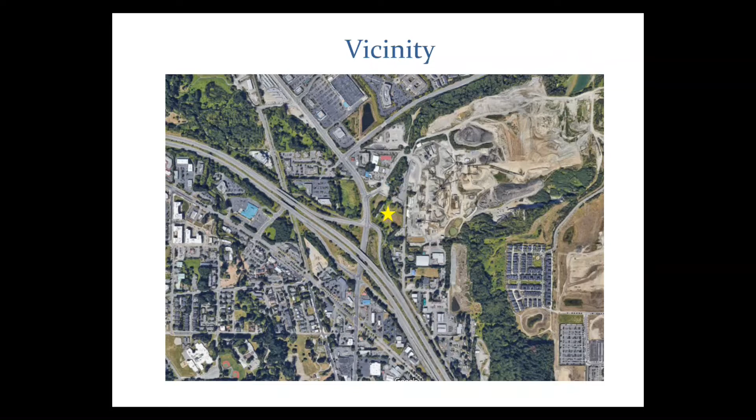Okay, so here we go, the project. The Evergreen Ford proposed site is in eastern Issaquah. It's adjacent to or across the street from the Lakeside Industries site and just off of I-90. Here's the project site again. It's zoned intensive commercial, and the auto dealership use is appropriate. It's an allowed use in that zone.

Surrounding properties are, as I mentioned, the Lakeside Industry site to the east, I-90 to the southeast, and commercial properties to the northwest and southwest. You'll notice in the presentation that north will change and point to the left instead of up, so we've tried to put a north arrow on there to help orient you, but let me know if you're getting confused, and I can clarify that.

So, existing conditions: this is the former Carlson Kennel site. One of the kennel buildings is still on the property but will be demolished. The North Fork of Issaquah Creek runs through the top portion of the site.

The bird's eye image you see here is an older view before the creek was relocated. The creek relocation happened, I think, one or two years ago. We do have an aerial photo showing the current location, and as you can see, the site is mostly vacant with some trees and other vegetation.

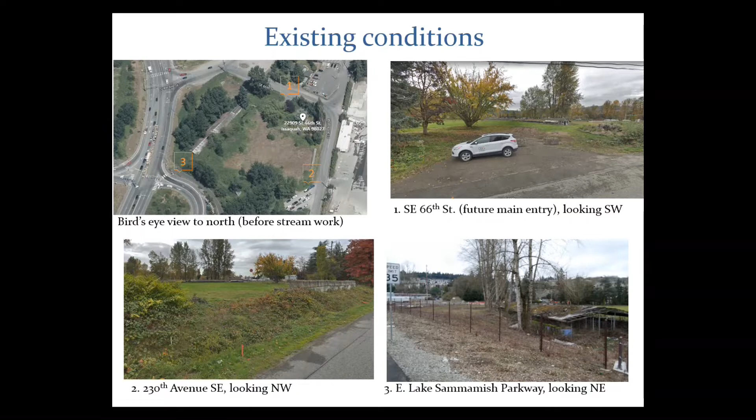Part of this project is also a lot consolidation. There are 2 parcels that make up the development site that are in the process of being joined. And then these images show the former alignment of the creek and then the new alignment.

The stream realignment was done by WSDOT as part of a requirement after the salmon culvert replacement case. They did all of the work, and the city did not review permits for that project.

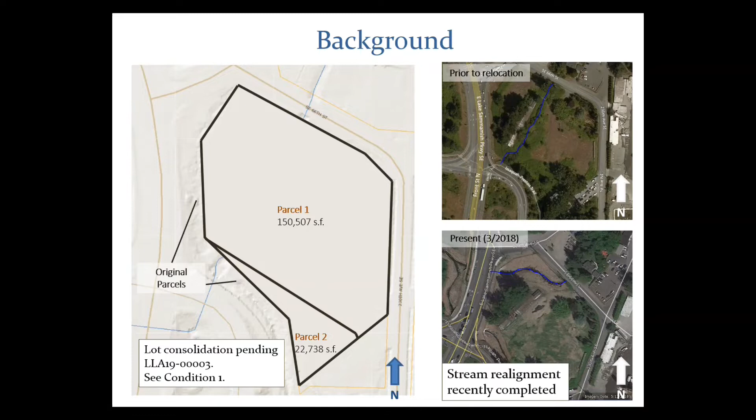So in addition to the stream, the stream obviously is a critical area. The city has buffer requirements for critical areas. A stream has a 100-foot buffer requirement. The applicant is asking for a 25-foot reduction to that buffer for this project.

We're still working to determine the exact location of the ordinary high water mark, and right now they're surveying the staked location of the stream, so that's a condition. I haven't included the condition language in the presentation, but I've cited conditions where I'm talking about them, so you can read the full text in the staff report.

This is an area that we're also still working on. The buffer is shown in purple on the map. That's the portion of the buffer that's on the site. The buffer is 75 feet in either direction of the stream, though, so the buffer extends also onto the right-of-way.

The green shaded area is where we've generally shown that there may be additional buffer impacts when they're replacing or installing sidewalks or bike lanes or doing improvements to the roadway. Those additional buffer impacts need to be studied and mitigated as well, and that will be reviewed with construction permits.

The site has a mapped floodway and floodplain, which I've shown in the picture on the right. The stream relocation may have eliminated the floodway and floodplain, or at least the floodplain. If that is in fact true, the applicant would need to get a map change through FEMA, and that's pending. At this point, we don't have documentation that the floodplain has been moved or removed.

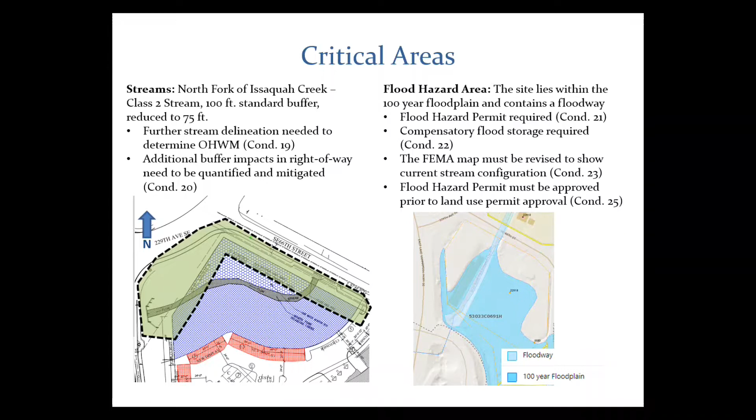So there are still conditions that they need a flood hazard permit. That may go away if they're able to amend the map.

A couple infrastructure notes: the site, in addition to having the creek and the floodplain, is also a critical aquifer recharge area, so its hydrology is feeding drinking water. I passed out a letter we received from the Sammamish Plateau Water District, and they had some concerns over the stormwater plans for the site, wanting to make sure that aquifer is kept clean.

So the applicant is working with us to refine their stormwater design. We feel that there is a way to get to a place where both the city and Sammamish Plateau agree that the design is good, and we think that can happen without majorly reconfiguring the site. So we feel confident that we can move forward with the land use approval and figure that out with the site development permits.

The site will be accessed off of 230th Avenue Southeast and 66th Street. The access off of 66th Street will be designed as a pedestrian priority street, which is a Central Issaquah standards street type. We're working with the applicant to figure out some sight distance issues at that intersection and also redesign the corner where 66th and 230th meet.

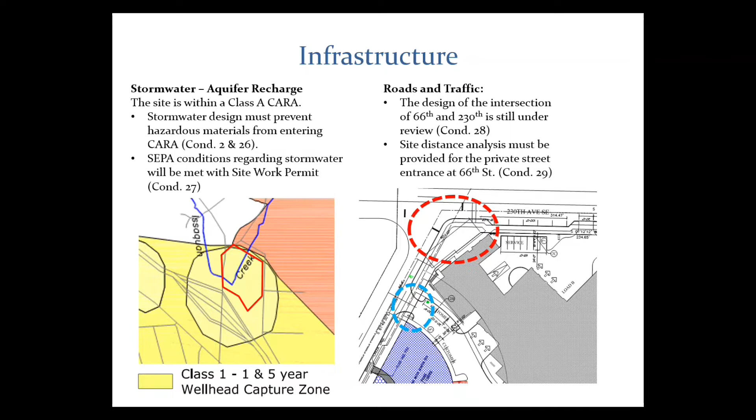Okay, here's the site plan. The proposal includes 2 buildings. The main building will house a Ford dealership, a Lincoln dealership, and a service and parking facility. It'll be a structured parking garage with service uses on the bottom.

And on the very bottom of the site, a display pavilion building will be there. That was a way for the applicant to meet the street wall requirements, because that is a frontage on East Lake Sammamish Parkway. So working with the applicant to figure out a way to meet that street wall, they suggested a display pavilion use where they could display antique cars or potentially hold community events, and we thought that was a good solution.

I also want to point out the red areas are merchandise display, and we wanted to make sure those were seen as display and not parking. Although cars will be there, this is not required parking, and it's not counted toward their parking. There's no stipulation on how the cars need to be oriented in that space. Essentially, it's like a shelf for their wares.

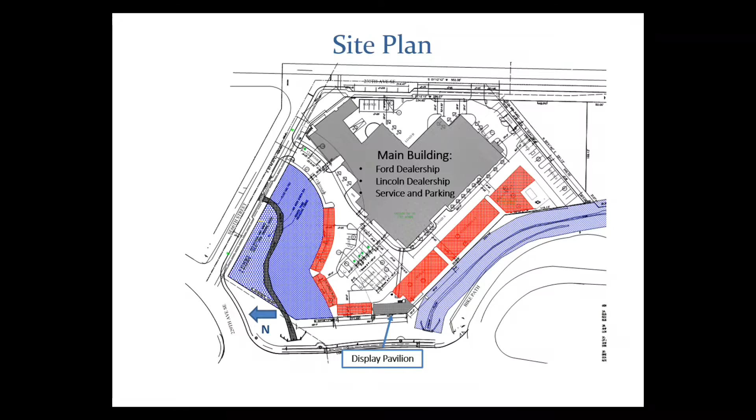Just a quick summary of compliance with code: it does meet the floor area ratio, height, setbacks, and impervious surface standards.

I'm going to go through a few interpretations we made when reviewing this permit. They'll make sense when I talk about them.

The pedestrian priority street is a street that has a landscape strip behind the sidewalk, so the sidewalk blends into the road and then has a landscape strip behind it. We thought it was appropriate, since that road was adjacent to the critical area buffer, to have the buffer serve the function of that landscape strip. So we haven't required an additional landscape strip on that side of the street. There is landscaping on the other side of the street.

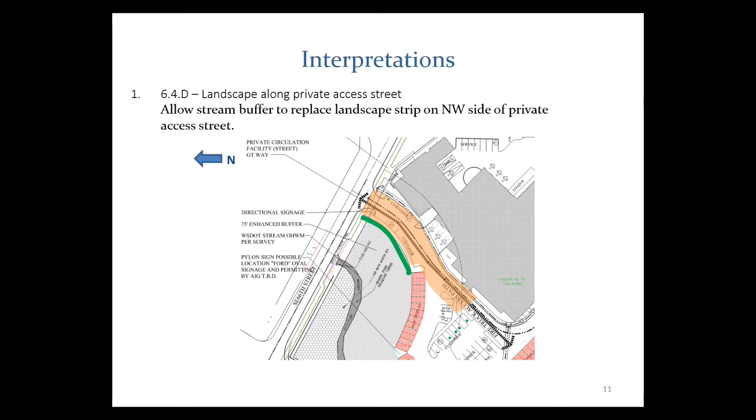This site would, according to Central Issaquah standards, require a through block passage, but some of the neighboring land uses and the critical area didn't really make that possible or make sense. It's not an environment where we want to encourage a lot of pedestrian activity, with the I-90 off-ramp to the south and Lakeside Industries to the east. We also wouldn't want to impact the buffer by having a through block passage through the critical area, which didn't leave much opportunity for one without bisecting the site. So there will not be a through block passage.

Similarly, the build-to line is required, but we've decided not to require the build-to line within the critical area buffer, to avoid impacting the critical area.

Along 230th Avenue Southeast, that's actually the edge of the Central Issaquah plan area. Once you go onto 230th, you're outside the plan area. So we excluded that street from the building frontage requirement as well.

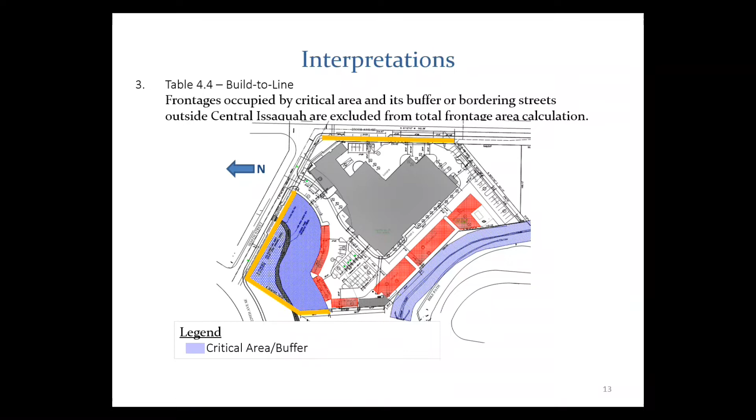The Central Issaquah plan does show the site for a proposed park, but the park strategic plan, which was adopted in 2018, does not. Since the park strategic plan was adopted after and is more current than the Central Issaquah plan, we've deferred to that plan, so there's no park location there.

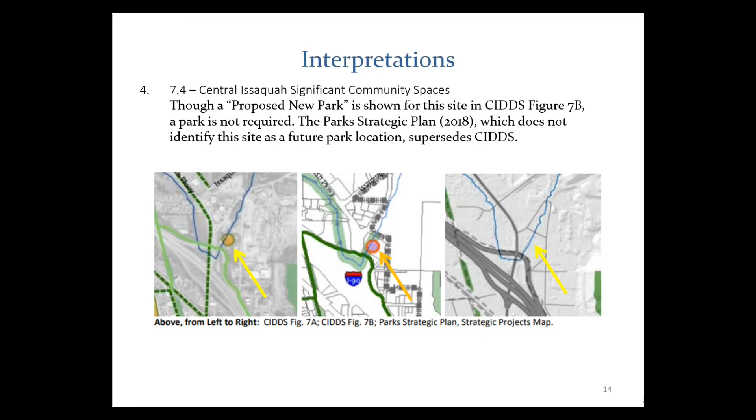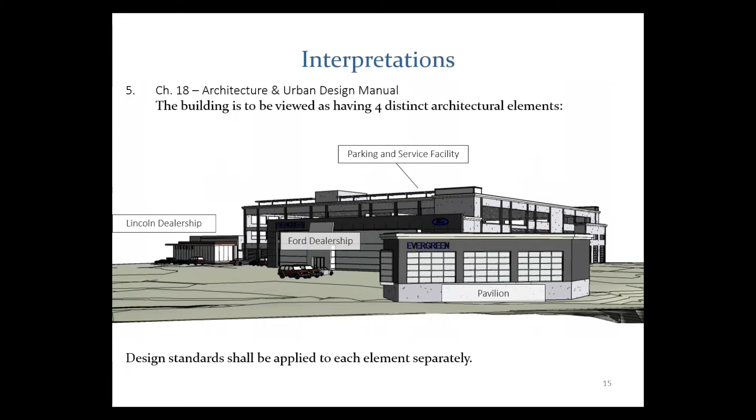When applying the design manual to this site, we interpreted the manual's approach of allowing sites with multiple buildings to have different styles, applying that by allowing each of the different elements to stand alone as distinct architectural features. So the Lincoln dealership and the Ford dealership are two different businesses with different franchise requirements for their designs, and those will be treated as two different buildings essentially. The Pavilion building is also its own building, and the parking and service facility functions as its own thing as well. Each of those will be seen on their own and will need to comply on their own.

We're actually in the middle of the SEPA comment period. The proposed MDNS was issued last week, and we're looking at some stream and buffer mitigation issues. The applicant spoke with the Department of Archaeology and Historic Preservation about this site, and although there's no mapped artifacts or historic structures, it is a stream area, so there's a high likelihood there could be cultural resources. We'll add a condition to address work stoppage if anything is discovered.

As I mentioned, we're still working through some circulation design issues. As far as public comment goes, we received one comment asking about the project's sustainability, and a comment I handed out from the Sammamish Plateau about stormwater and the critical aquifer recharge area.

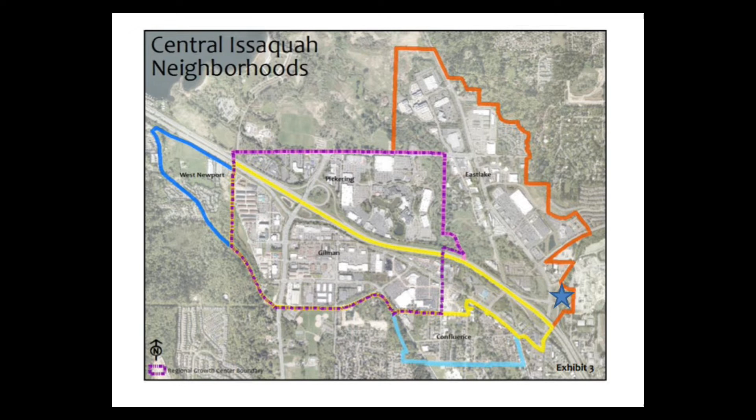This project is down here at the blue arrow, or the blue star. As I mentioned, it's right on the edge, in the Eastlake neighborhood of the Central Issaquah sub-area. Each neighborhood in the sub-area has some developer obligations that collectively help the city achieve the vision for the Central Issaquah area.

Each of these obligations is reviewed in the staff report, and we found all but one to be compliant. The one we're requiring a condition for—and they may have already met it with their redesigned plan set—is that the developer must provide wayfinding for local and regional trail users as supported by the city's wayfinding plan. The Issaquah-Preston Trail is down here on the southern part of the site, so we've asked that wayfinding signage be provided at the site's entrances to direct folks around the corner to the trail.

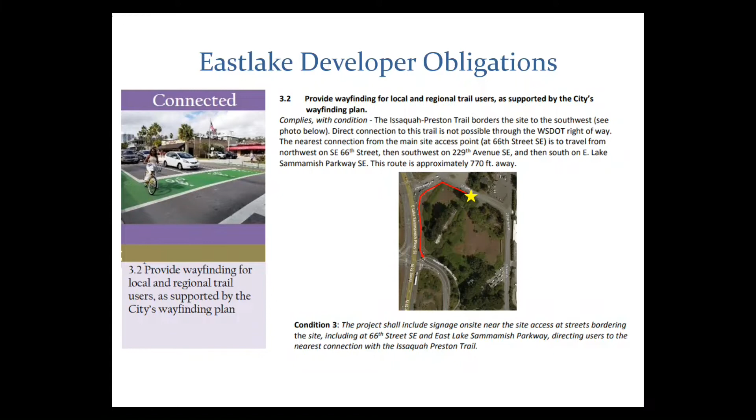It'll be used by dealership employees to store cars and to park customer cars for them. We looked around the site to find the nearest bus stops, and they're quite a ways away across I-90 down on Gilman.

All right, so I'm just going to go through a couple more of the design elements of the project and then the design manual itself. The pedestrian priority street is going to provide a way for the building to front directly on a street instead of having the building front on a surface parking lot.

So it'll have travel lanes and parallel parking, a walkway that's separated with bollards or other safety features to prevent people from walking into the roadway, and then the landscape strip. We've asked for some more design details on, for example, lighting and bollards, but at this stage of the review, they've provided sufficient information that we can review the details later with construction permits.

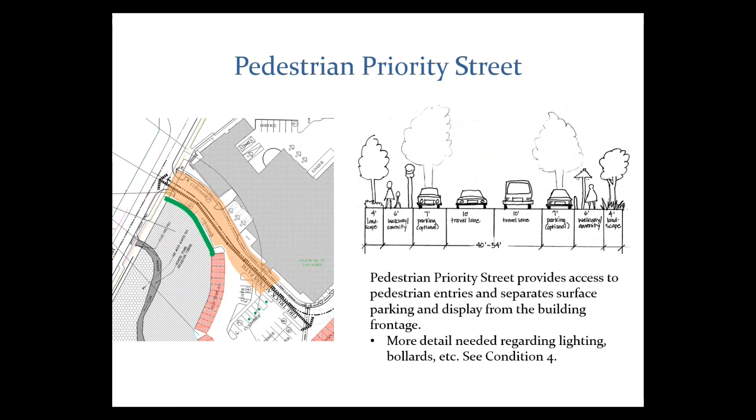Southeast 66th Street will be designed to a collector arterial standard, and that has a requirement for a landscape strip. And they do provide a landscape strip on all of the frontage except where the bridge crosses the North Fork. They've asked for a deviation because it's difficult to establish a healthy landscape strip on the bridge with not a lot of depth for planting.

So the deviation from the standards is under review, and we propose adding a new condition because the deviation request has not yet been approved. We had hoped we could have it approved before the meeting, but it's still under review, so I'm proposing a new condition that they need to have that with their construction permits.

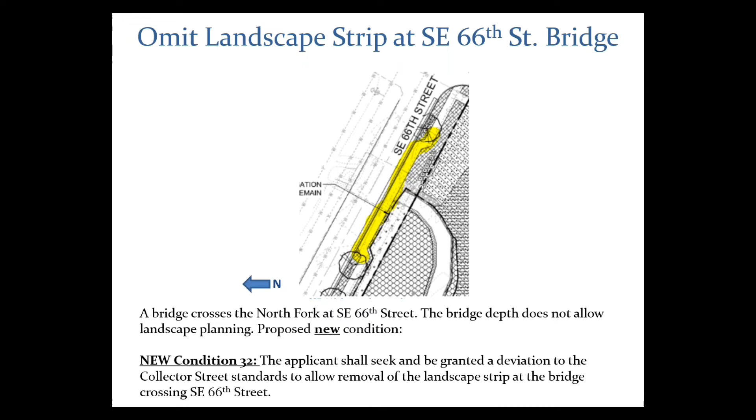So an adjustment of standards is being requested to move the bike lane off of the roadway onto behind the curb, onto the right-of-way, and then put a landscape strip between the bike lane and the roadway. And then in addition to that, a sidewalk.

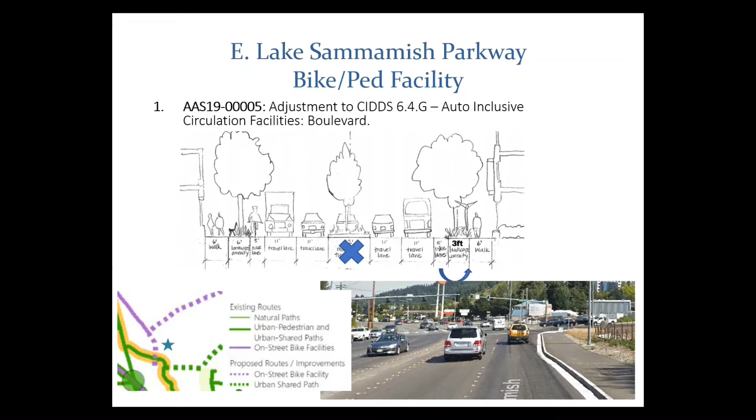On 230th Avenue, right now the design has 2 driveways, and the city's engineers were concerned that didn't meet their access point spacing requirements. So we're asking for a redesign, or at least reconsider those driveway configurations.

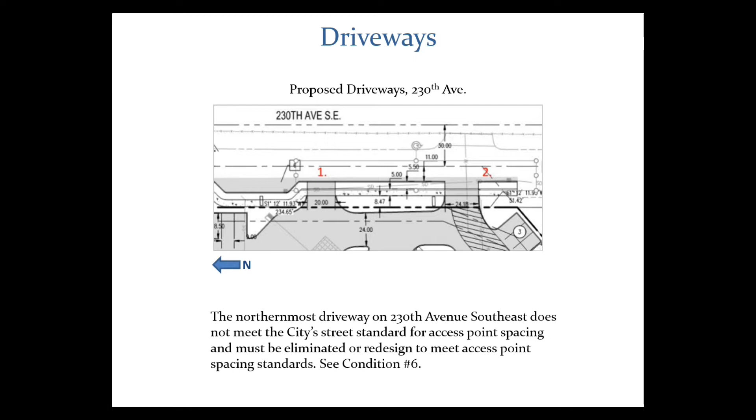I just wanted to briefly touch on the parking. Since this site appears to have so many cars, and there is a parking maximum for this location, but as I mentioned, a lot of the cars on the surface will be display spaces, display merchandise, and not required parking. And the maximum parking number only applies to surface parking and not the structured parking.

So a total of 300 spaces are proposed, but only 64 spaces of parking will be surface spaces. So it does comply with the maximum space and the structured parking allocation as well.

And this is an issue that we're still working with the applicant on, but CIDDS does require a commute trip reduction plan for this site, and it's possible that it wouldn't apply if the facility employs fewer than 100 people, but we didn't have information on employment numbers, so at this point, it's still a condition that they need to meet.

The rooftop has some landscaping. The Central Issaquah standards, or the design manual, have requirements for active uses in the urban core for rooftops, but this is not in the urban core, and they are using the roof for car storage. So they will have screening and a trellis for screening and some interior landscaping.

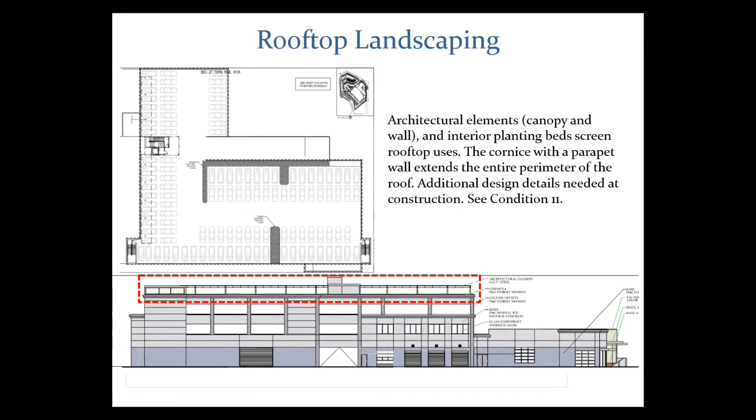This is a shot of their landscaping plan. The site does have several significant trees on it right now, and the plan is to not retain any of those. That is allowed under the Central Issaquah standards as long as they meet replacement or in-lieu payments to replace trees, and we're still working out those details. Those will be worked out with the construction and the landscape plans.

The mitigation area planted by WSDOT was not done with city review, so we didn't know whether that area was sufficiently planted. We required the applicant to make sure it did comply, and in the meantime we worked with our stream consultant at the watershed group to review the plantings. They concluded that the WSDOT plantings did meet city standards, it just needed more ground cover. So as part of the applicant's mitigation of their new buffer area, they'll need to bring that existing buffer area up to city standards.

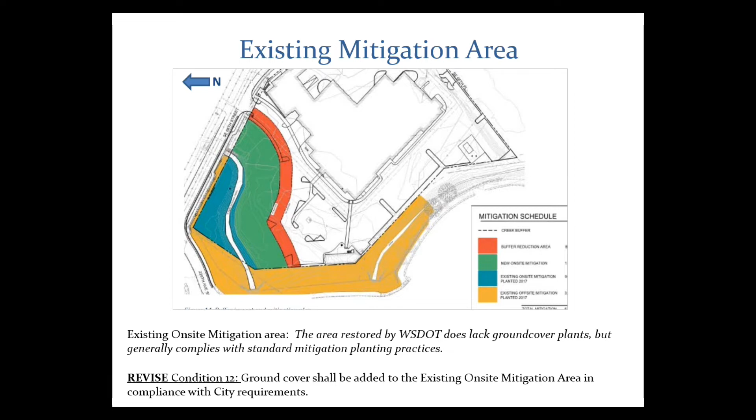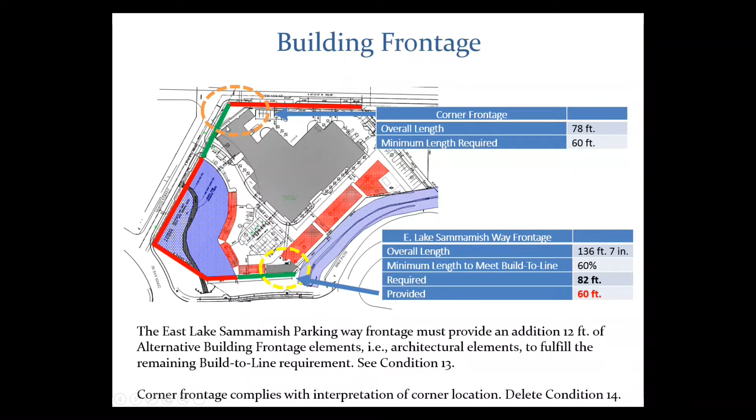And then the frontage up at this corner, the property line actually - I'm going to go to the next one. The property line is a little bit inside of the corner, so as you can see, the building fills that whole corner frontage. If you noted in the staff report, this corner change was received late, and I misunderstood the location of the property line, so I had a condition that they needed to provide additional frontage. But after reviewing it more closely, I see that the property line is actually set in from the curb and that they do comply.

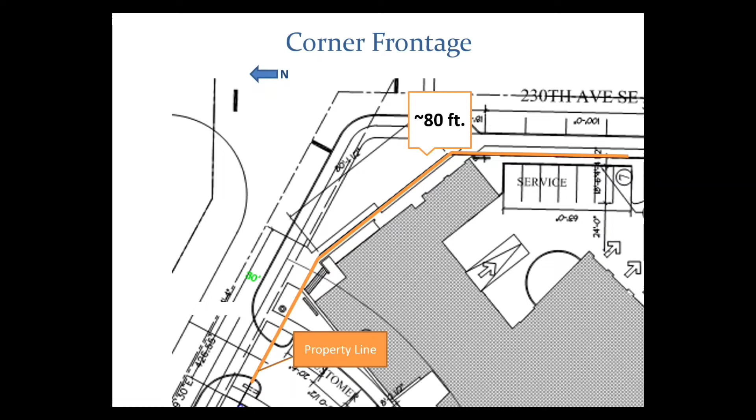Just a couple other site design issues or conditions that I'm requiring: they need to show all of their above-ground utilities on their plans and make sure they're screened to minimize visual impact. We're asking for additional design details on their waste enclosure, including wall materials, roof, size, et cetera. We know its approximate size and location, but there are a few more details to work out at construction.

The property is located in the traditional Issaquah design area. The style the applicant chose was Northwest Revival, which is appropriate in this traditional Issaquah area. As conditioned, we feel the proposal is substantially compliant with the Northwest Revival style, and there are a couple areas we wanted to discuss with you. We worked pretty hard with the applicant to push them to bring their design into compliance, and they made several changes while balancing the design requirements of the Lincoln and Ford franchises. So we think the results are pretty good.

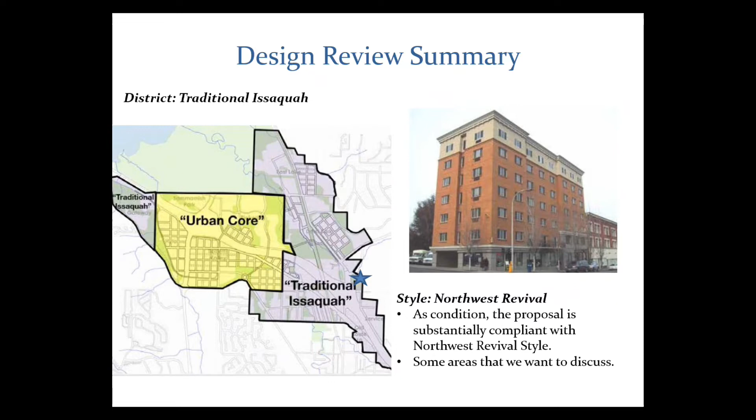I'm going to go through each of the four architectural elements separately and then open it up for discussion. After I finish, I'll give the applicant a chance to present, and then we'll do public comment and open it up for discussion.

The Ford dealership facade has a mixture of glass, stone, and metal. The frame around the outside is a limestone panel - I'll hand this around. The middle feature by the door is a metal aluminum composite panel. The parking structure is visible behind it, but we're looking at that separately. The two main forms are the glass curtain wall and the limestone stone frame around it - those are the main elements of that design.

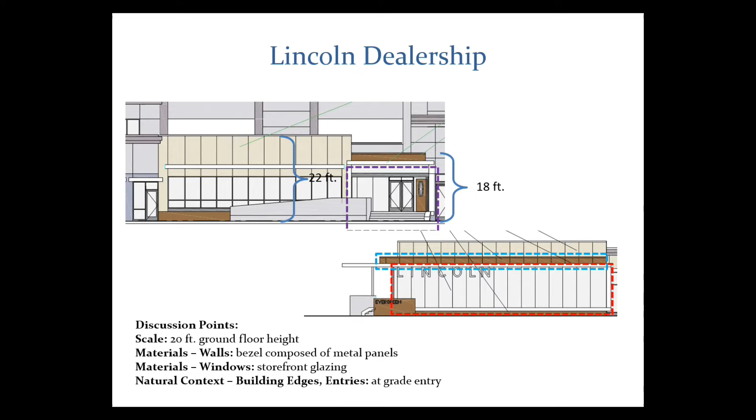The parking and service facility is cast concrete. It'll be painted in three different colors: the base will be a medium gray, the body a lighter gray, and the cornice a dark gray paint.

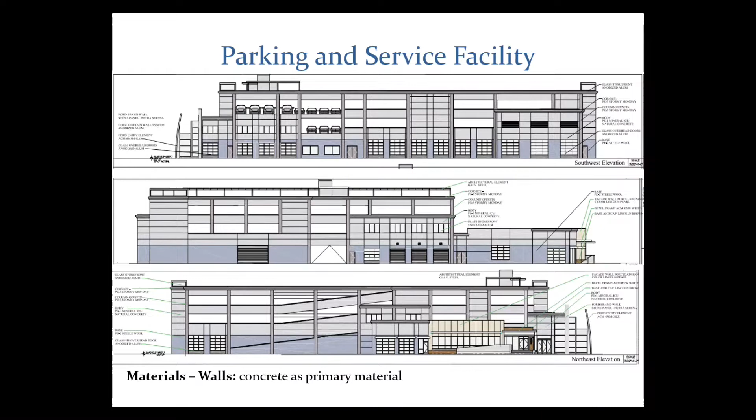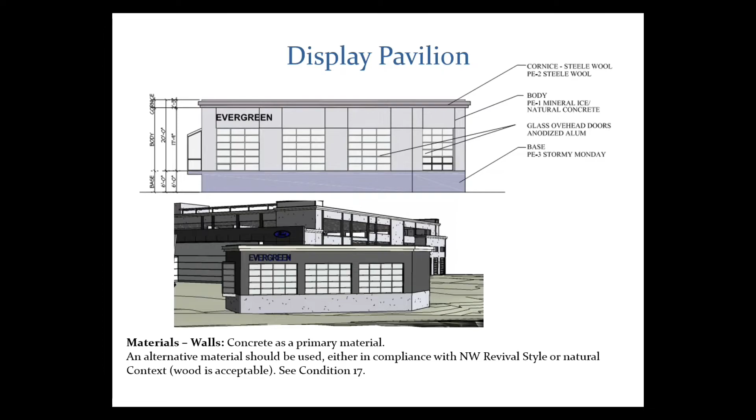That same color scheme is proposed for the display pavilion, which has the concrete base and windows. We don't have a shot here of the doorway, but it's essentially a structure with a lot of windows to be able to see the display vehicles inside. And that is the end of my presentation.

David, would you like to say a few words? So let's see if the commission has any questions before we switch over. I thought what we said was we'd like to hear the applicant's presentation, and sometimes then you want public comments, clarifications on this specific presentation before we move on. I think maybe better wait till the end. Okay, I'm fine.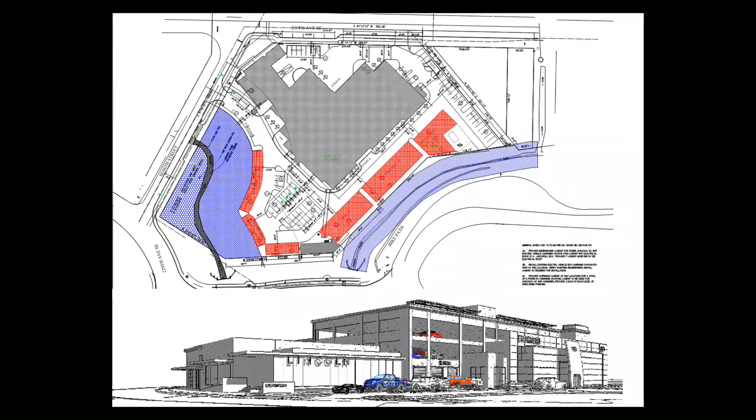Would you like your PowerPoint or no? Or you can just leave this up too. Briefly, my name is David Estes, you need to come stand by the microphone. Oh, God. My name is David Estes. I'm the project architect for the project. The rest of some of the other project team is here to answer questions.

As opposed to a formal presentation, we'd really like to get your feedback and questions. It's a very complicated project, and not knowing the commission's exact questions and interests, it doesn't seem right to just go off in a direction without knowing what you're interested in. So I think we'd prefer just to answer specific questions. Katie and the planning staff have done a great job of presenting the project, and I'm not sure there's a lot we'd add. If you have questions about why we're doing this, what some of the economics are, and what some of the items we've done that don't show up here, especially in terms of sustainability, we'd love to talk about it, but we'd rather answer your questions than present something and not know what you're really interested in. And it seems to be a good point, and I know from public comment the same thing happens on specific questions. So we'd be more than happy, or part of the rest of the design team would be more than happy to answer specific questions, because Katie's done such a great job presenting the project.

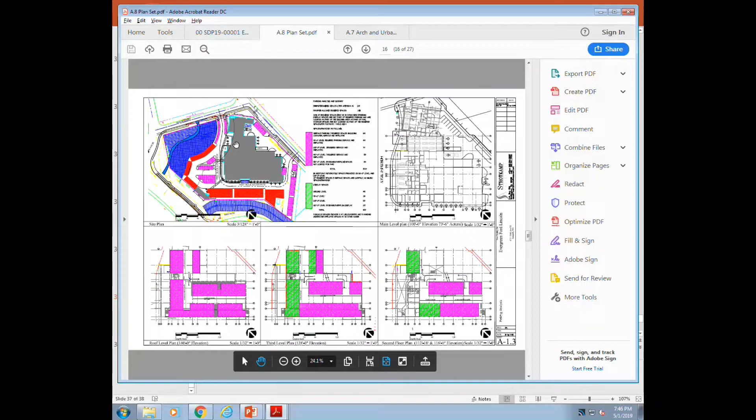Is there any parking planned around that, or a pedestrian walkway? How do people see that? There's a pedestrian walkway from the private street. David, come up, you can't talk from the audience.

Those cars are on display, they're not for sale cars. What cars will actually be in there is open to debate. But there is the potential to move those cars out, the doors open on the sidewalls, and a community event could be held there. That's working out between Dan and the city for whatever that event might be - could be a grand opening celebration or whatever.

But it's a little hard to work the details out of that in the future and not when it's physically there and something comes up. It's a good question because it's something we've had extensive discussion about.

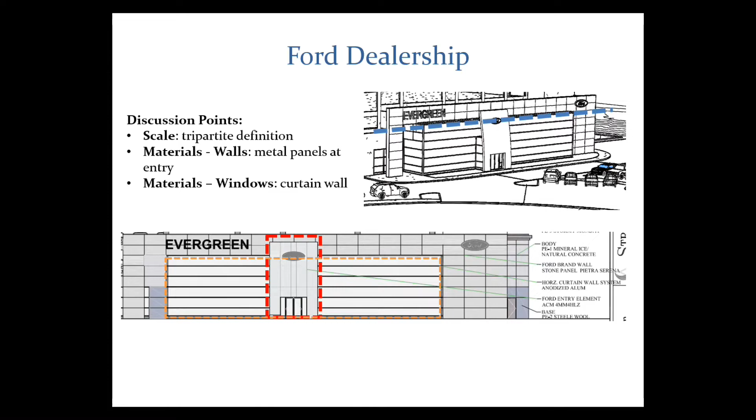So I'm still confused on the parking. On your presentation, you had a chart that identified it, not the colored thing, but just in your PowerPoint presentation. Could you go back to that and help me?

The amount allowed or required is 123 minimum and 246 maximum. The 300, as I understood it, weren't those in the parking structure? So there's 64 surface spaces provided. I'm lost on that, let me do a little math here. So the 64 spaces are included in the 300. There are 64 surface spaces, and then 240-something structured parking spaces, and those together are 300 spaces. Okay, that's what I wasn't understanding.

Thank you. And are the display sites or spaces included in this number, or are they separate? No, those are not included in that number. Although a number has been assigned to them in the plans, we wouldn't necessarily require them to adhere to that number, because that's basically their space for displaying merchandise, so it's not regulated as a parking space.

Another question I had was on the accommodation of the request from Sammamish Plateau Water to be able to mitigate any adverse effects to the groundwater, I guess. And the obvious question is, so what if you can't? How well developed are the plans to be able to accommodate that?

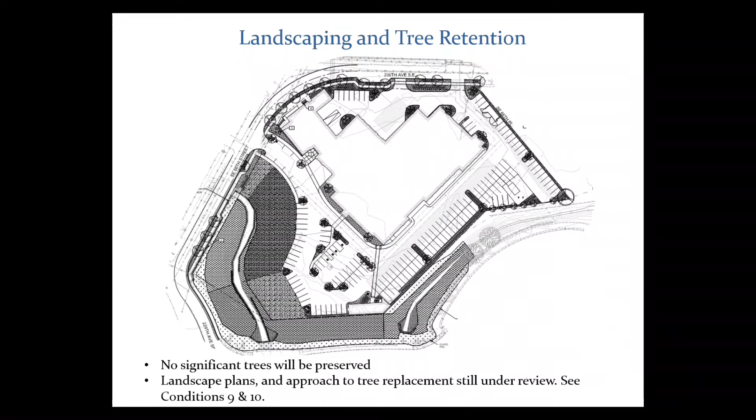Those trees being planted - I believe I said a large deciduous tree going in, I can't remember the name, might be a Zelkova. So how big does that tree get? Eventually it'll be a 60-foot tall tree over time. Yeah, it's a nice species.

One question, not related to landscaping: on page 19 it mentioned removing a compensatory flood storage easement. I was curious what that was. A project down the road a few years ago, Evergreen Ford built a detail shop, which also had flood requirements, and part of that was a condition that they needed compensatory flood storage. They got an easement to put that on this site. It's been determined that easement is no longer needed, and the city is extinguishing it. So if it hasn't been completed, it will be in short order.

Okay, and then a question about cars next to the buffer zone. Can cars overhang into a buffer zone, or does there have to be some kind of wall, fence, or railing to prevent that? I would say no, they can't overhang because that would be a buffer intrusion, but we haven't put any conditions in terms of wheel stops, though we can certainly think about that. There'd have to be something for all those stalls pointing into the buffer to prevent that. At a minimum, I would assume that there is a curb there. Yeah, but if there's a curb, that's your wheel stop, then you don't overhang. Right, okay.

On page 27 of the report, there was a table with standards, allowed, required, and it didn't show anything else. It looked almost like an Excel chart that didn't fit in or something. Wondering if there's actual... the version of that should have been there is this. Oh no, not this one. Not that one. This one, there we go. Not sure what happened to that. Almost looks like there's a column that went off the page.

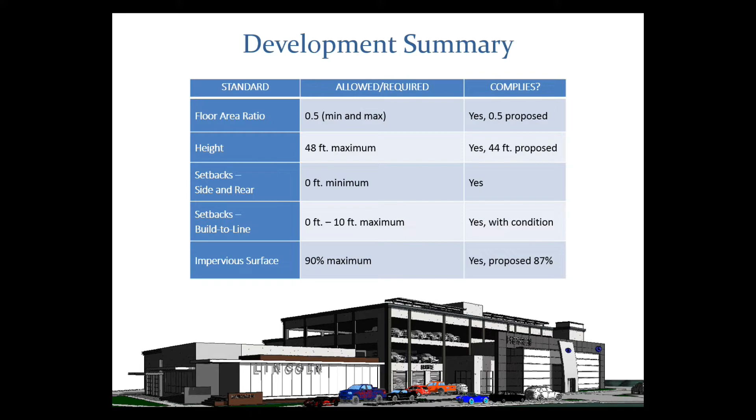I can fix that. So the 0.5 is a minimum and a maximum? You have to have exactly 0.5. That's a code challenge, isn't it? Yeah, we didn't discover it till they came in to talk to us. Might warrant a future code amendment. Like right away. Yeah, because I had a note about that, and it didn't show that here, and I had a question about whether it was min or max. Both, yes.

Just a general question: is there a threshold for changes that happen during permitting that would make it come back to the commission? We've been kind of working through this, and our goal is for the development that's approved by the Development Commission to be essentially what's built, so that if there's any change to the outside of the building or the site that would be easily recognizable, if you were to look at it and say that's not what I approved, those are the types of things we would bring back. So material changes to the facade of the building, reconfiguration of major site elements, we would come back with those. But if it's changing things internal to the building, or what are some other things we would not bring back?

Additional internal detail is a good thing not to bring back. If a planter island moved around in the parking lot but they're still meeting the same percentage, we wouldn't bring that back. And I know that seems kind of like an odd standard, but the commission is aware that when we've had, for instance, a project in which they moved some of the parking out of a garage into a surface parking situation, which would have made the parking visible, they still met all the standards, so there was no issue with compliance, but it would have been a perceptible change, and we wanted to come back and have that conversation. So it is a judgment call, but we are looking at the drawings, the staff report, and the items discussed by the commission to sort of know where we have set the bar to decide when we need to come back.

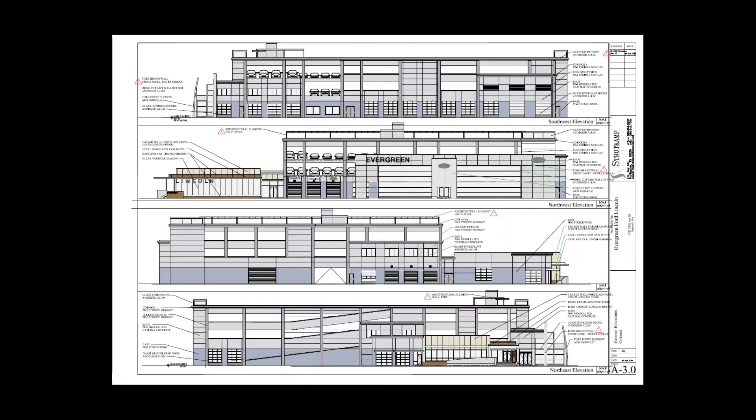And to make that as much as possible a contemporary interpretation of the style. Now, I would point out that on the vertical over horizontal issue, some of the best examples in Seattle of the Northwest Revival style happen to be 1- and 2-story buildings. Sure, one of the great ones is the Phil Smart building on Capitol Hill, which is a car dealership.

So we've tried to work very hard with the 3-part structure, with the essence as much as possible of the style, but faced with certain franchise requirements and items, we've compromised on that.

Now, as Lucy can tell you, she and I had long discussions over the issue of Northwest Revival style versus Northwest Contemporary. There's no question that Contemporary fits better, but it's not allowed. And in terms of the other styles in the district, the other ones fit even less. So you've got, as you pointed out, there's no perfect fit here.

Sure. And I agree, and so I guess that was our question. I just want to find the edges of this thing, and if your position is you have no room to move, then I think it helps us identify which way we're moving.

We've moved as far as we can with Ford, to the point that Katie had to put some words in the staff report to sell changing the brand wall to stone to Ford. So we pushed hard, trust me.

Then can I ask you, Lucy, so let's hypothetically say we're going to screen this through a different style. What then is asked of staff and applicant to go through this process again? Do we literally take it as is and screen it through that, or are there additional asks or changes, or do we cycle through this whole process again?

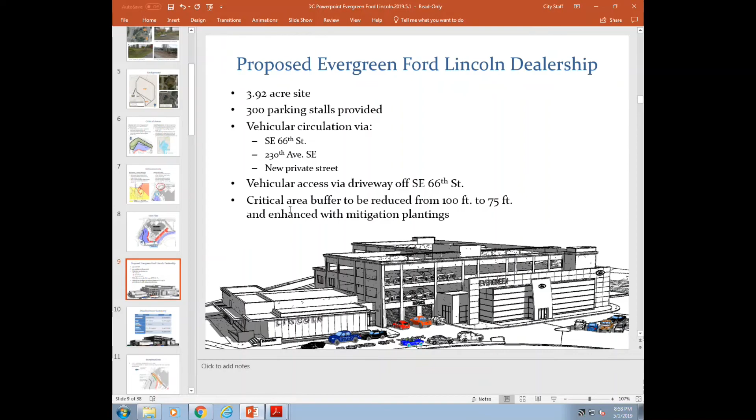In the staff review on page 131, the glass curtain walls of the Ford and Lincoln dealership are inappropriate. And then on page 129, the Ford entry features clad in metallic panels are inappropriate, and the Lincoln bezel material is inappropriate. So it seems to me we've got a glass curtain wall and metal panels that are the front and center elements of the building that staff is saying are inappropriate, and it sounds like that's a Ford requirement. I see a loggerhead there that I don't see how we get past.

Because if we just say, okay, go ahead and do the glass curtain wall and metal panels, I think we've thrown out a big portion of this style requirement and just said it doesn't have to meet that. Then the question becomes, what do we do with the next project that comes along and says, we want to do glass curtain wall, metal panels?

Well, are you corporate? No. Well, I should be able to do it because they got to do it. And then it's all the way down the line. Yeah, I think it's a catch-22 because there are corporate identities. McDonald's, Apple stores, they all look like certain things, and you can look at them and identify what they are. So this is no different.

So how do you blend what we want to see as far as the style goes with what the corporate identity wants to be, which is for somebody to instantly look at it and recognize what it is? And if in the future Issaquah wants to attract other businesses, we don't want to detract heavily from their ability to have their corporate image. So for me, it's a catch-22. You want to retain your identity, but you also want to attract businesses that have their own identity, if that makes sense.

Yeah, but the code as I read it doesn't have allowances that say if you have a corporate identity to preserve, you don't have to follow these standards. I'm thinking a little of the Gilman Lofts challenge we had. Was that the urban Grange style we finally decided on? Right, and it doesn't look like a traditional Grange building at all, but it was close enough, and the design was close enough that I could map the fundamentals of that style onto that much more modern structure.